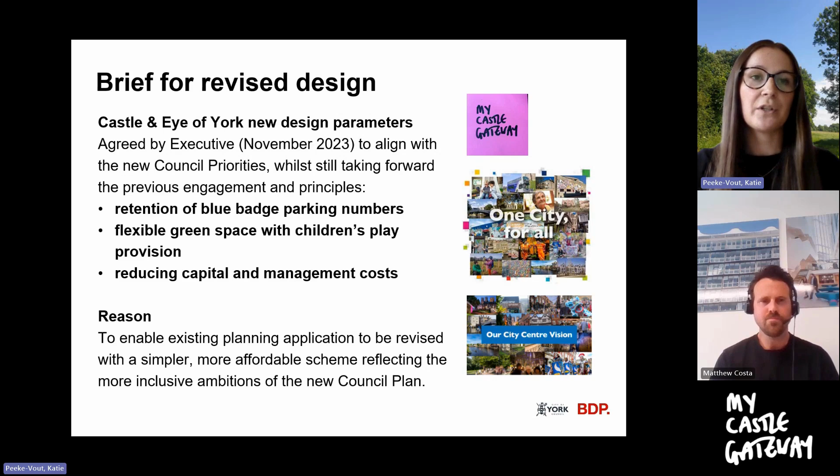The new brief for the scheme requires that 30 blue badge spaces be retained, that the scheme focus on creating greener space with a greater focus on informal play, and reducing the upfront capital costs of delivering a scheme and ongoing management costs. This is to ensure that the revised planning application is simpler and more affordable, reflecting the more inclusive ambitions of the new council plan.

The planning application will be an amendment to the existing application, retaining the same red line boundary, including Tower Street in front of the Hilton, all of the Clifford's Tower area, the Eye of York, Castle Car Park, and the boardwalk area to the rear of the Castle Museum.

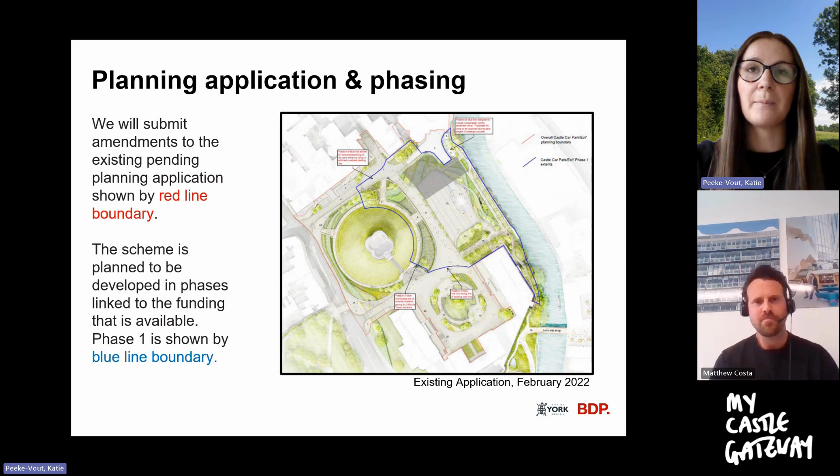However, it's proposed that the scheme be developed in phases linked to the funding that is available, and phase one of the delivery of the scheme is shown by the blue line boundary. I'll hand over to Matt now to talk through some of the concept designs.

When we talk about creating a new green space, York has a very unique character, and part of that is the historical character and the ability for the space, now being a green space, to tie in with existing features such as the historic walls around the city centre that create a sort of green network around the city.

Also importantly, with the city centre being so compact and hard in nature in terms of its pavement, being a green space, I think this will be a place that really gives some respite for those visiting within those busy areas within the streets and within the city. I think it's a really key feature that, going to a green space, this could really create quite a unique place for people to visit in York.

The other aspect is a scheme that's designed for all. As Katie mentioned, part of the brief is to re-provide the 30 blue badge spaces that currently exist within the Castle Car Park. We want to go beyond that. We don't want to just say we're doing car parking. We want to make sure that all the features within the site are accessible and inclusive, and we want that to underpin everything we do, from play to seating to parking to access.

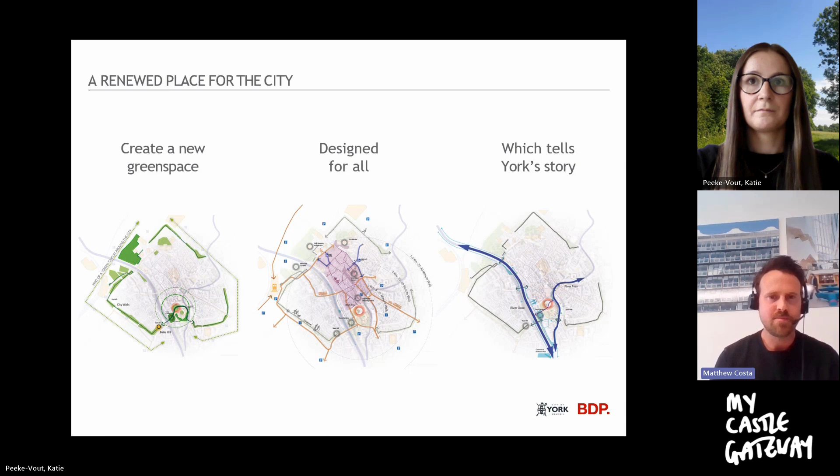So when you make bold moves such as referencing the water and the moat within the landscape, it is quite a bold planting design, a landscape feature that can actually be appreciated in its entirety. That's quite a key thing we'd like to pull through in the design.

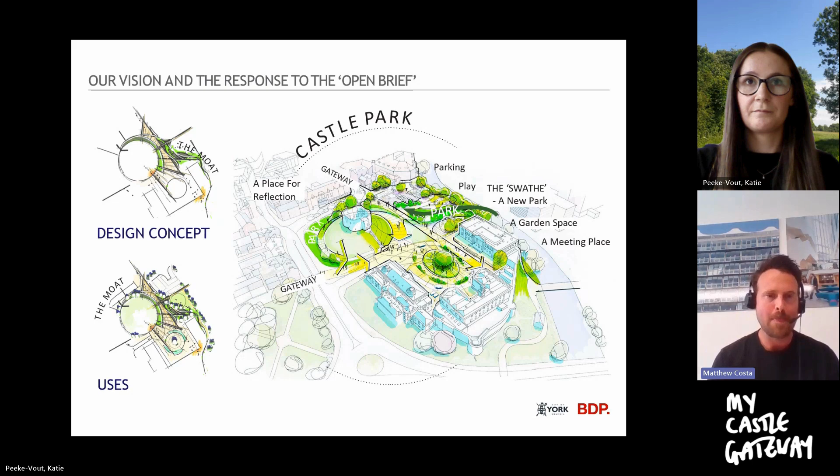So this is the concept plan as we've got it, and you can see the bold move we're trying to create with the swathe. The idea is that bold landscaping, signified with the green hatching within this plan, is referenced, and it's going to be a really strong and striking feature within the landscape that tells that historic narrative.

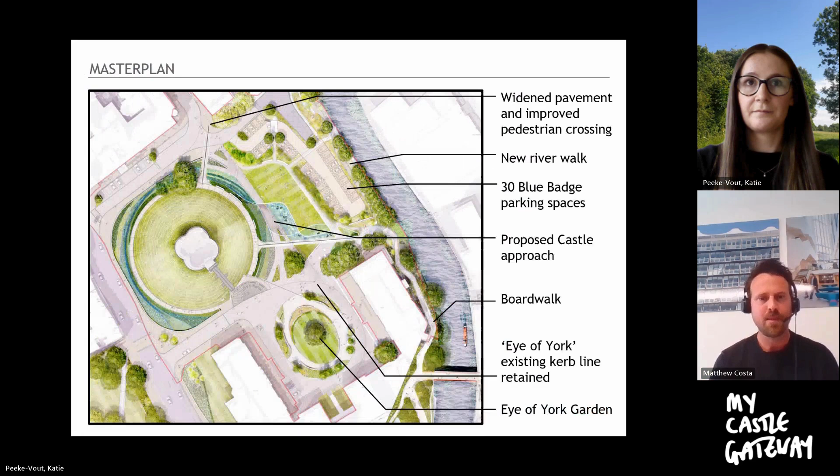Going into a bit more detail, running from the top of the plan through to the bottom, we want to improve the connectivity of the site, looking to improve pedestrian connections from Castlegate across into the site. We also have the blue badge parking just to the north, which sits around the existing turning head of the service yard highlighted in grey.

We want to create a new connection, which we're calling the Castle approach. This is a direct connection that links through the space towards the Eye of York area. Either side of that you have Clifford's Tower and the new planting scheme that sits as part of it, and on the other side, the open lawn space where we're looking to integrate elements of play, and also elements of SuDS and water-style planting to reference the idea of the river-style landscape coming into the design.

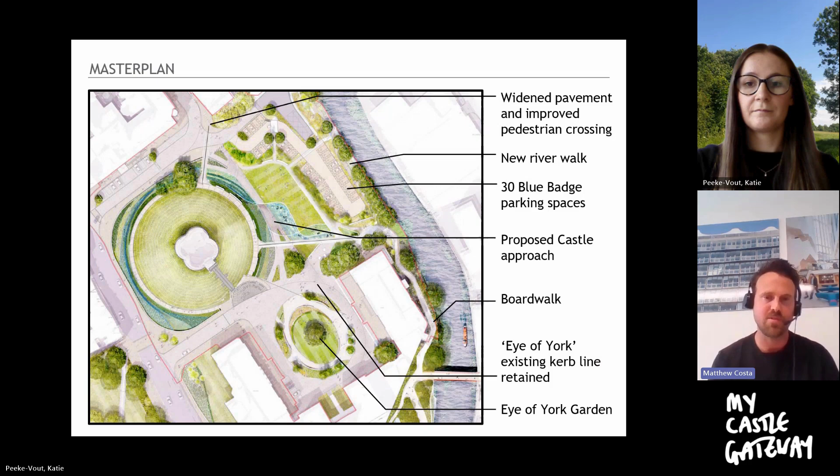You also have the new boardwalk which runs down the Foss, and we'll go through that in more detail later. Then the Eye of York space, how that works with the complexities of the court and the museum having very different uses, and how the landscape reacts to those different uses whilst creating a garden space.

As I mentioned before, these are the concept designs. We're still at very early stages, so we've still got a long journey before we go towards planning. Part of that is that the designs you're seeing at the moment, whilst they are our initial concepts, are still to be developed.

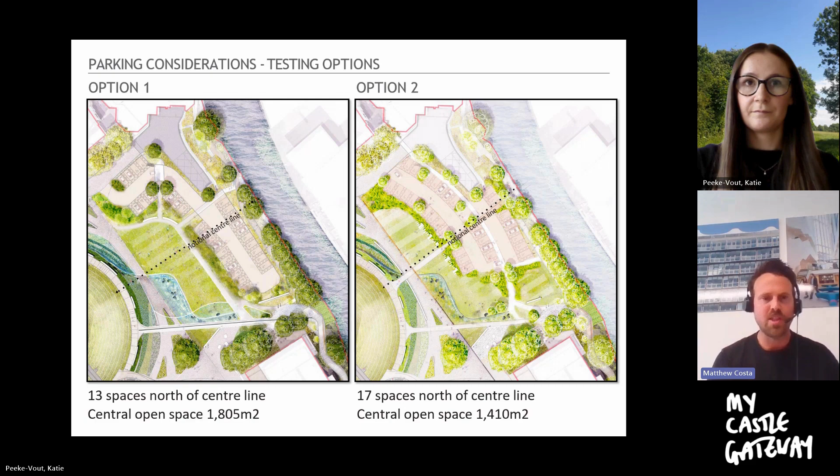But it does mean you can create a larger central space. The option on the right-hand side looks to push as much car parking towards Coppergate and the city centre as possible, really prioritising access towards the city centre. The compromise with that is you end up with a more separated green space, rather than a singular larger green space, you have a series of green spaces that sit around that parking arrangement. But these are just things to consider that we're still in the process of designing through as part of the concept.

Going into a bit more detail on the lawn space, one of the key things we wanted to make sure of was that whilst we're creating an area for blue badge parking and an area for heritage, we are creating a usable space that is primarily green. We're looking to put in a large area of lawn, a flexible area within the centre of the scheme, flanked with the different planting designs we want to build into the scheme, which reflect the historical narrative.

There are also elements of play, so we want to feed some of that play space within the scheme, and we're looking to really create natural play and more of a play trail around the central space rather than a dedicated play space.

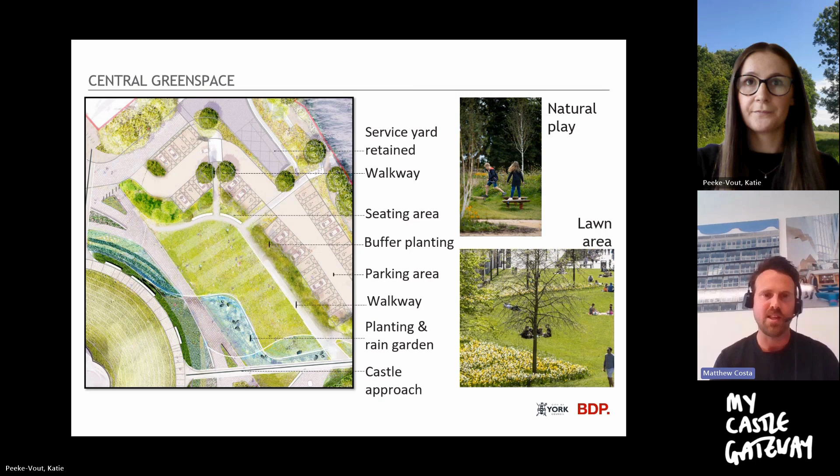We're really just trying to reference some of the key access points, such as the castle approach, the new access ways coming from the car parking, and areas of seating, making sure that we create seating spaces that are in the right place, have a good aspect, and give a good vantage point to view some of the historical elements, such as Clifford's Tower or the clock tower at the debtors prison.

Given that this space is now a green space, one of the main things we want to do is use the landscaping to tell that historical narrative. Various different areas will look to do this, and I think I've already mentioned the idea of the swathe, having this natural landscape that references the water that once wrapped around Clifford's Tower, in reference to the moat.

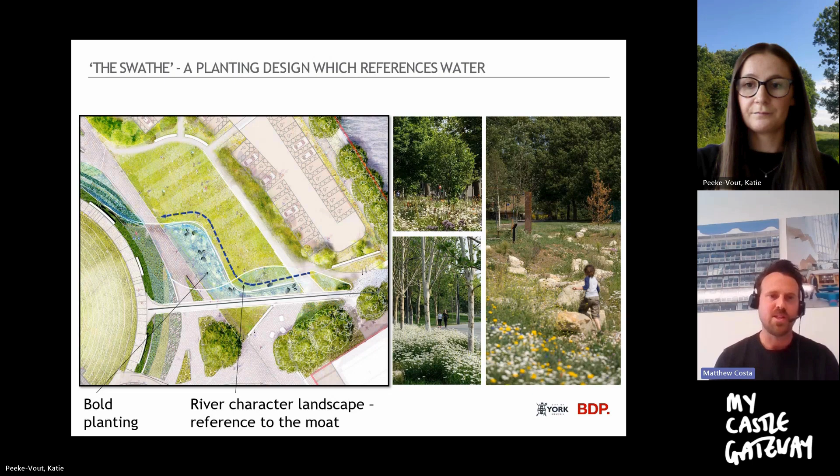We are working with our engineering colleagues to see if we can create a bold planting design, but also a planting design that can attenuate some of the surface water which currently sits on site, so that it has an actual purpose of attenuating and capturing water, as well as representing water in a historical reinterpretation.

I mentioned about the play space, and part of what we'd like to do in terms of the narrative of this swathe and bold landscape that wraps around is that the play can react to some of that. We want a series of incidental play elements that combine together into a larger play trail offering a lot of play value, with each element considered for all. Going back to one of our founding principles about making this a site designed for all and accessible for all, we want all these play elements to have things like sensory play or accessibility for people in wheelchairs. We're looking to design that as part of the next steps and build that into the design.

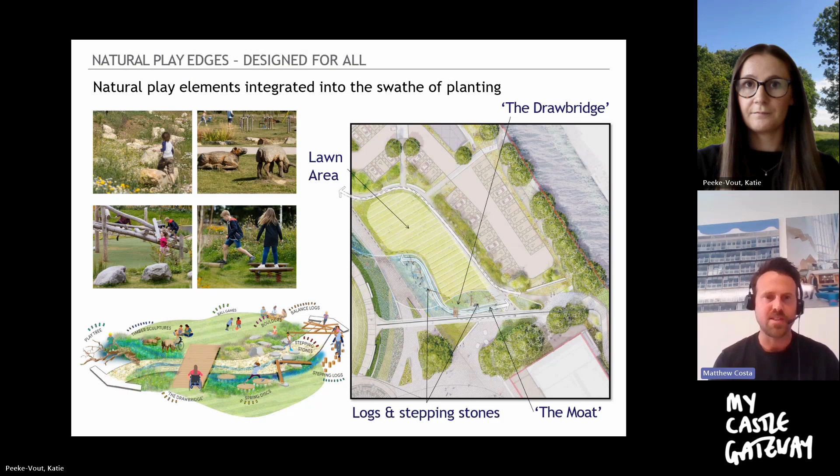Again referencing some of the historical features within the site, the actual former entrance point to the castle was off from the current access point going into the Eye of York space. So there is an area of historical significance here. It's the gable end of the female prison where the drop is, which has some historical sensitivities, and it's also the space where the castle entrance formerly stood.

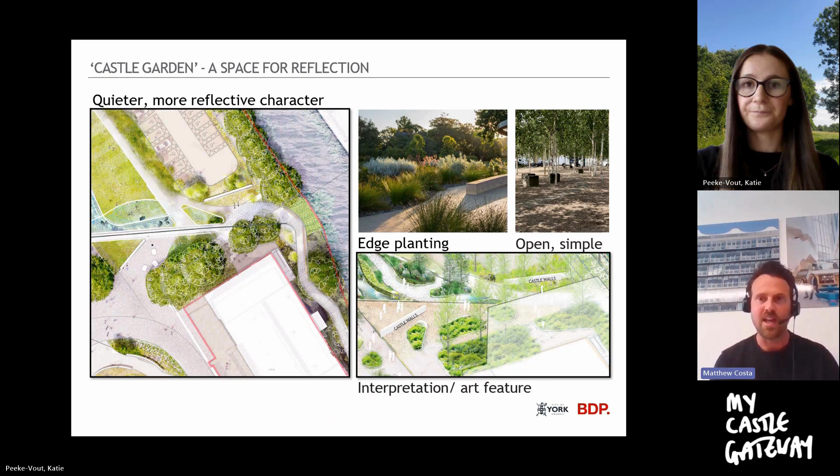To reference this, we'd like to create a garden space that people pass through that has a different, more reflective character compared to the more informal river style character we're referencing in the lawn space to the north. We could perhaps use interpretive walls or edges that reference the fact this was once the entrance to the castle, giving a nod that this is a historic place, and something that if you scratch a little under the surface, you'll find elements of it throughout the landscape design.

It's going to be an elevated boardwalk about 3 meters wide, so fully accessible, and will be, for all intents and purposes, a connection that lets you lead yourself through some of the tree planting, wildlife, and river edge environment that's very different to other areas. I think it's going to be a real feature for the site, connecting the Eye of York to Piccadilly to Castle Mills.

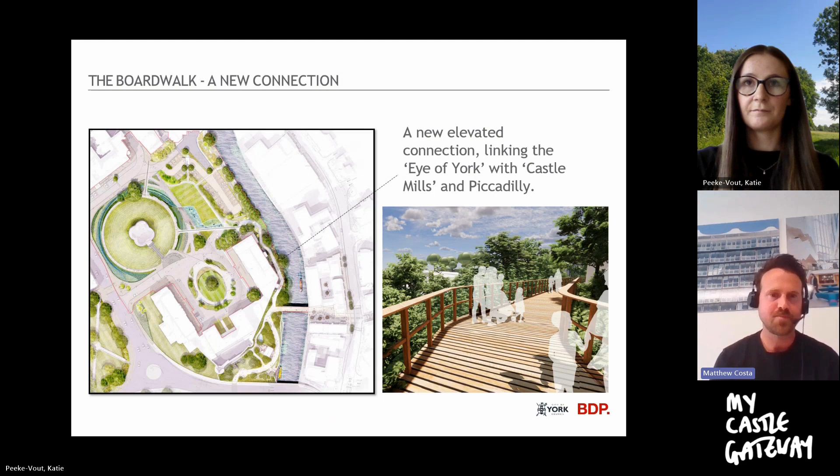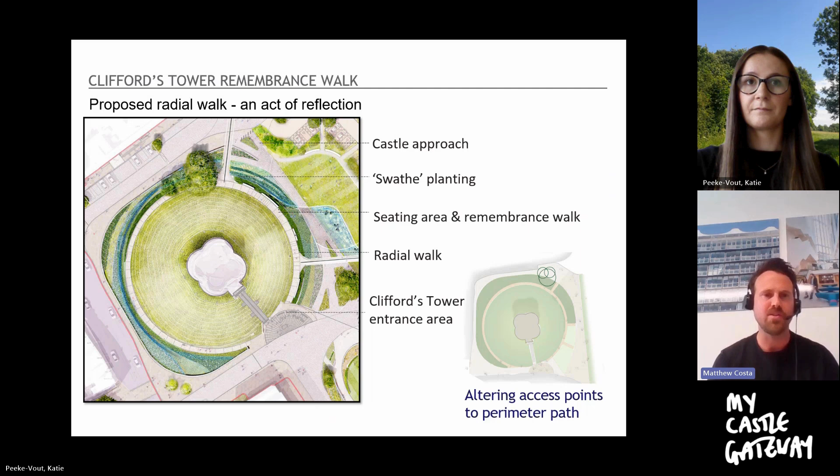The swathe, again, and talking about the act of remembrance, we're trying to make sure all the historic elements from the museum building and the courts to Clifford's Tower have an improved setting. Part of that is creating a new walkway around the base of the motte, around the base of Clifford's Tower, tying into the entrance space for the English Heritage entrance to Clifford's Tower, seen at the bottom of the plan. This will also allow us to create this new landscape that wraps around and gives that dramatic historical reference within the landscape design.

And then so the final space is the Eye of York space. This is quite a tricky area to design, because on one side you have the museum, and on the other side you have the Crown Court, and they have very different character and different requirements as to what the external space needs to do. The Crown Court rightly has some very serious requirements, and we need to respect that, whereas the museum needs to act as a cultural hub, a place that people want to visit and curate.

So we want to create a new garden space here, but we want to make sure that that garden space references those different adjacencies. Where you've got the Crown Court, we would have more planting to try and buffer some of the sounds from activities in front of the museum. In that space we're looking to open out, so the planting gets cut back, and you have a more open area, more curatable for the museum, and a space that people can use and congregate within.

Then to the north of this area, we have a more open space that faces back onto Clifford's Tower. This could be an education space, a speaker's corner of sorts - a place where people can walk to, can protest towards, can stand and gather within. The historical reference of that, facing power towards Clifford's Tower, is a very important thing, socially and culturally important, that we want to retain.

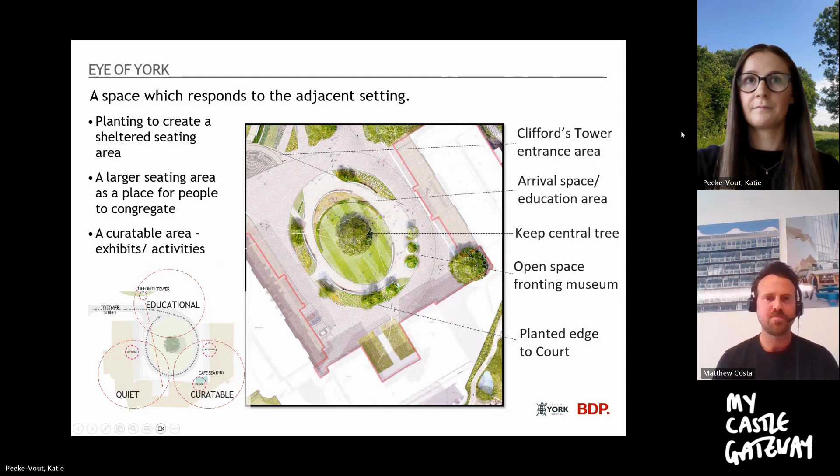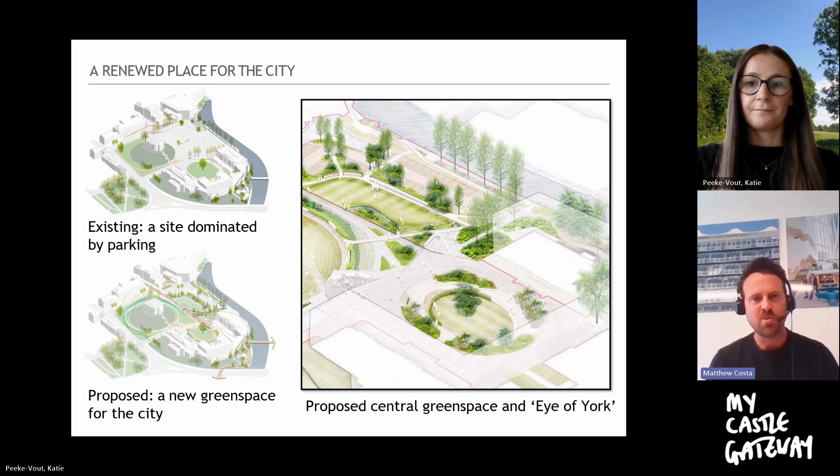And finally, this is the last slide in terms of the concept presentation. It's really just an overarching slide to say, look, the site at the moment is a car park, dominated by parking, and we want to create a new green space for the city - a green space that is accessible for all, designed for all, and through the landscaping we tell that historical narrative.

Thank you, Matt. So the next stage for the concept designs is public engagement. Our public engagement will launch on the 15th of August, and we're keen to receive as much feedback as possible. So we invite you to join us for the public events taking place in early September to share your thoughts through our social media channels or directly to the Regeneration mailbox.

The deadline for receiving comments will be Friday, the 20th of September. There'll be lots more information on our My Castle Gateway website, including some updated blogs outlining the key points around the concept designs. Once we have all the feedback from the concept designs, this will allow BDP to produce the final design for the scheme, which we will be putting into planning.

In terms of a broader timeline: March to July 2024, BDP have been working on these concept designs, drawing on the previous engagement, the open brief, and the new council priorities. We've had initial discussions with some of our key stakeholders, and those conversations will continue throughout the design process.

Launched in August will be the public consultation, with the main events running through the beginning of September. We'll also be working with our consultants to review the costings for the scheme, to make sure we have this information to ensure that the scheme is deliverable within the budget.